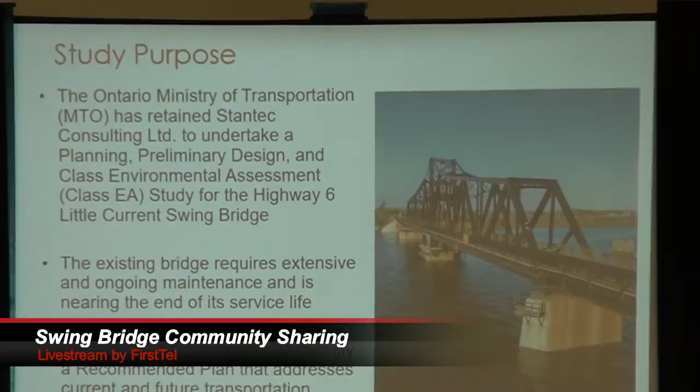Okay, so first of all, the study purpose. As I mentioned, the Ministry of Transportation has retained Stantec to undertake what we call a planning, preliminary design, and environmental assessment study for the Highway 6 Little Current Swing Bridge. Why are we doing this? Well, the existing bridge requires extensive and ongoing maintenance and is nearing the end of its service life. So what we want to achieve at the end of this study is to identify a recommended plan to address the current transportation needs at the bridge crossing.

So we're going to talk a little bit about the process that we're following. So the study is being carried out under the requirements of what we call the Class Environmental Assessment for Transportation Facilities. This is basically a pre-approved document that prescribes the process. These are the big picture statements that address the question, why are we doing this study? And then also during this phase of the study, we are identifying alternatives to the undertaking. So we're starting to look at potential solutions, and we'll talk about those in a little bit more detail.

The next phase of the study will be the planning phase. So we're just kind of nearing the end of this transportation needs assessment phase now. But then the next phase is the planning phase, and that will start with publishing a document that we call a study design report. So that will kind of confirm the first phase of the study and provide a blueprint for the rest of the study.

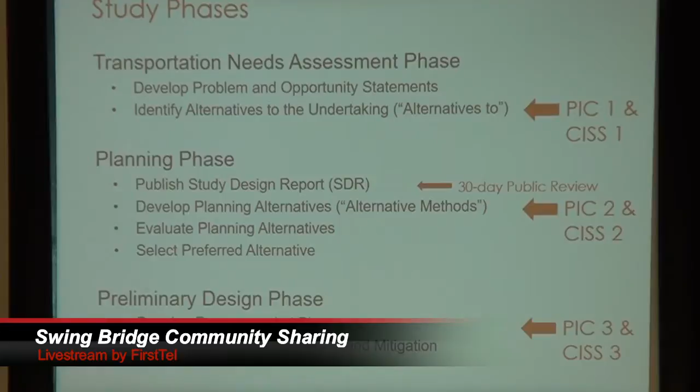Then we move into the documentation and environmental clearance phase, and that's where we publish what we call a Transportation Environmental Study Report, which is basically a report that documents the entire study from beginning to end, including those previous phases. So that will be available for a 30-day public review period. And then at the end of the 30-day review period, if there's no objections, then we will obtain environmental clearance to proceed to the next phase of the study, or the future phases.

And that would be detailed design, where the ministry will prepare contract documents and specifications, start acquiring property, relocate any utilities that need to be relocated, and then ultimately construction. So we're at the very early stages of this planning study. So a little bit of background about the bridge.

You folks probably know more about it than we do.

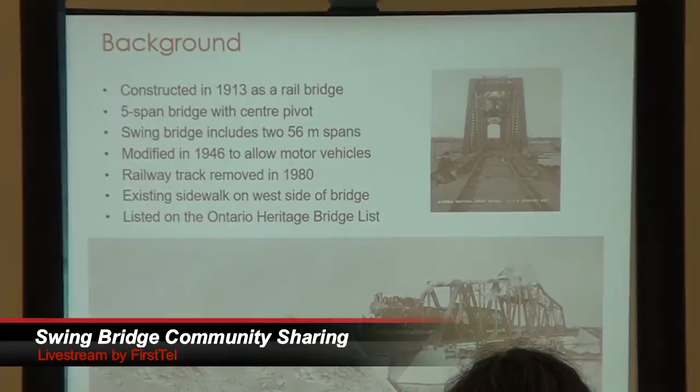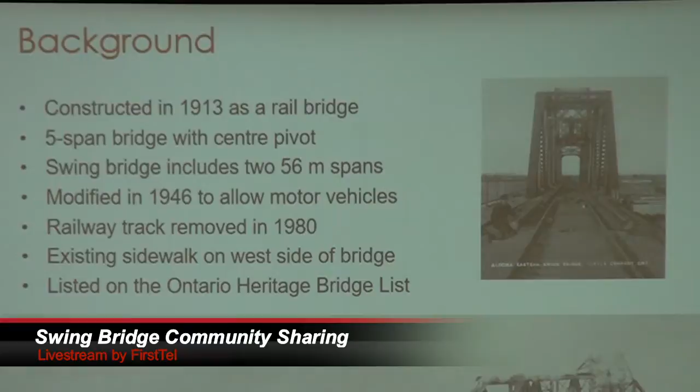It was constructed back in 1913 as a rail bridge initially. It's a 5-span structure, with just the center 2 spans that swing, making it a swing bridge. In 1946, it was modified to allow motor vehicles, so from 1946 forward it was a shared facility for rail and automobiles. In 1980, the railway tracks were removed, and the Ministry of Transportation assumed ownership of the bridge.

So from 1980 on, it became exclusively a road bridge carrying Highway 6 across the North Channel. There's an existing sidewalk on one side, and interestingly, it's listed on the Ontario Heritage Bridge list. This next slide shows the study area. The existing bridge crosses the North Channel, so we're really focused on this crossing. We're not looking at new crossings or new connections between Manitoulin Island and the mainland, just the transportation needs in the vicinity of the existing crossing. This blue area identifies a rough boundary of where we're looking for alternative crossing locations.

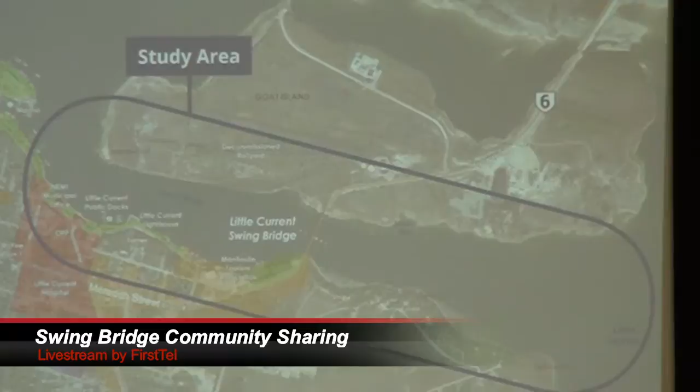So I mentioned the problems and opportunities. These are the overarching statements about why we're doing the study. There are a few problems with the existing bridge. It does provide year-round access, and it's the only permanent road connection, but it's a single-lane roadway, so there are delays associated with that single-lane traffic.

Currently in the summer months, road access is generally not available for 15 minutes of each daylight hour to allow boat access along the North Channel. So in addition to the delays caused by the single lane of the bridge, there are additional delays when the bridge swings open every hour to allow boats to move up the channel. Most importantly, the existing bridge is nearing the end of its service life and will require extensive and ongoing maintenance or replacement. So that's really the driver behind this: the age of the bridge, its condition, and the ongoing maintenance costs.

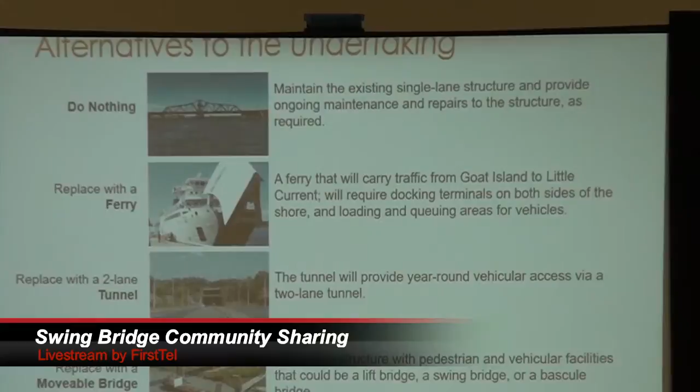So the first level of alternatives we look at are what we call alternatives to the undertaking. Just to recap the problems: there are some obvious problems with the existing bridge, namely its age and its ongoing maintenance costs. So what are the big picture alternatives to address this problem? That's what we answer with these alternatives.

The first alternative we're looking at is do nothing. As part of the Class EA, we're always required to look at the do nothing option. By do nothing, we don't just mean let the bridge fall apart - what we mean is really status quo: maintain the existing bridge, and continue to provide the ongoing maintenance and repairs required to keep this as a safe crossing.

The second big picture alternative we're looking at is replacing the bridge with a ferry. The ferry would carry traffic between Goat Island and Manitoulin Island. We should point out that it's not just a ferry - it would also require docking terminals to accommodate loading and unloading of vehicles.

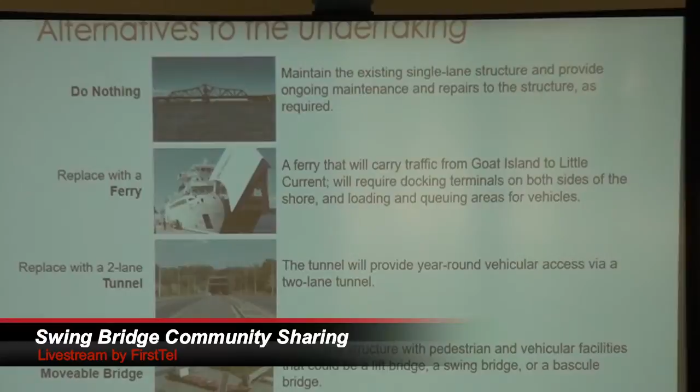The third big picture alternative is to replace the existing bridge with a 2-lane tunnel under the channel. This would provide year-round road access under the channel, somewhere in the vicinity of the study area. Due to the depth of the crossing required to accommodate the approaches, the tunnel could not be at the exact same location as the existing bridge - it would have to be shifted one way or the other to allow room to accommodate the approaches to the tunnel.

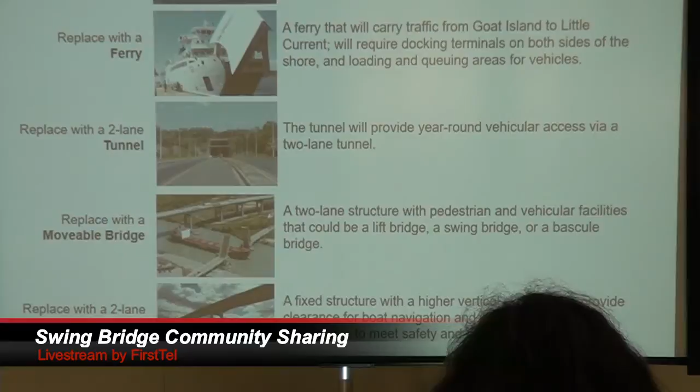The fourth alternative we're looking at is again replacing the existing swing bridge with a new movable bridge.

So again, it would be a 2-lane structure with accommodation for pedestrians and vehicles. We're saying a movable bridge, so it could be a swing bridge, or any type of movable bridge. It could be a lift bridge, or what we call a bascule bridge, where sections pivot and lift.

So that alternative is to replace the existing bridge with another movable bridge, and that could be pretty close to where the existing bridge is located.

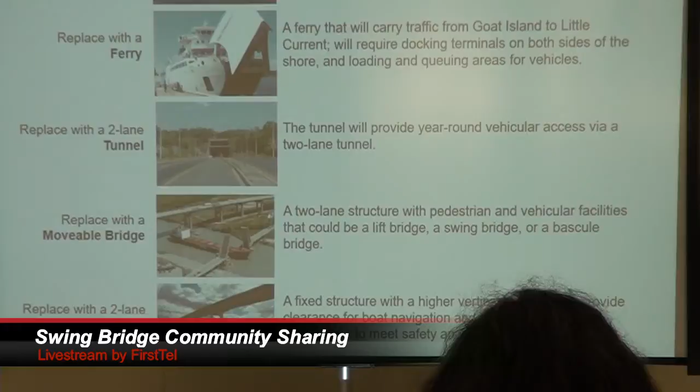And then the final alternative we're looking at is to replace the swing bridge with a 2-lane fixed bridge. What we mean by a fixed bridge is, so not movable, it would have to be high enough to accommodate the boat traffic underneath. It would require fairly long approaches to get the elevation up and over the channel so that the majority of boat traffic could cross under the bridge.

So again, because of the approach grades needed to get up and over the channel, it would have to be located a little bit further away from the existing bridge.

As part of this study, there are lots of different background studies and investigations going on that all feed into this study, helping us make decisions about potential impacts and evaluate different alternatives. This slide talks about some of the background studies ongoing as part of this study. We break them into three baskets: engineering studies, natural environment studies, and socioeconomic studies.

Under engineering, we look at traffic and safety, bridge engineering, foundation engineering, drainage and hydrology, highway engineering, and electrical engineering. So those are the very technical pieces we're looking at. Not only are we looking at the existing bridge, but also the engineering side of the different alternatives, whether it be a lift bridge, movable bridge, or fixed bridge.

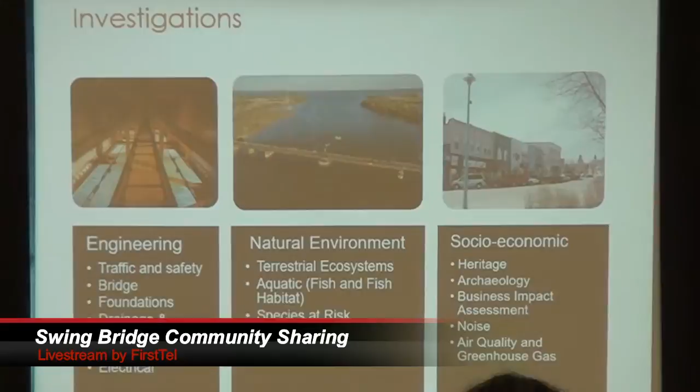Under natural environment, we have several different studies underway: terrestrial ecosystems, aquatic ecosystems including fish and fish habitat, and species at risk. Again, we gather background information so that we have a good picture of the existing conditions, so that when we look at different alternatives, we can compare them and compare the potential environmental impacts.

And then finally, the socioeconomic impacts. So we look at heritage, archaeology, business impacts, and noise and air quality. Again, we do the background baseline studies, then look at the alternatives and the potential impacts associated with them, and that helps us evaluate and select.

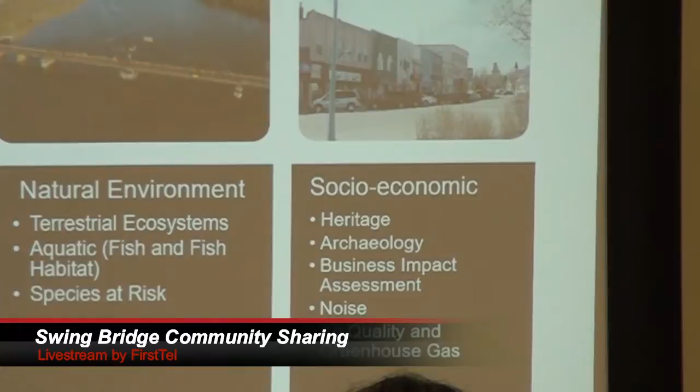Then we will have the study design report that outlines the blueprint for the study. That will be available for a 30-day public review in the coming weeks.

Then the next major milestone is the second round of public meetings and community meetings, which will happen next summer. That's where we will present more detailed alternatives.

The next major milestone after that is the summer of 2020, where we'll come back and present the preferred plan. Each of these major milestones starts with big picture alternatives; next summer we look at more detailed alternatives, and the third round in summer 2020 we present the preferred plan.

And then the environmental study report will be available for a 30-day public review period in the fall of 2020. So it's quite a long schedule, providing lots of opportunity for input and feedback and public meetings along the way.

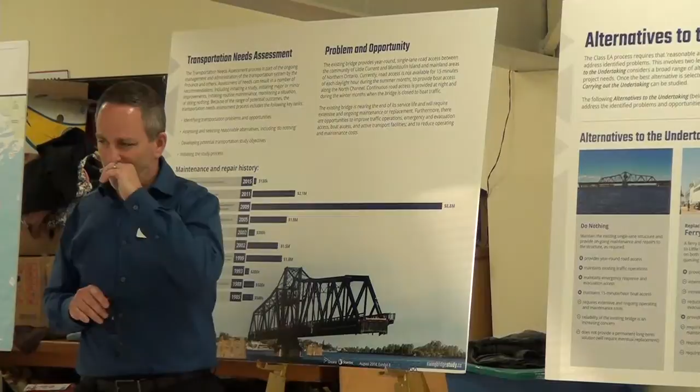Some of the disadvantages with do nothing are it does require extensive and ongoing maintenance and operating costs. Reliability is a bit of a concern. Because it's an old bridge, it could break down at any time, kind of like driving an old car. There is a concern from the ministry that the bridge could open and get stuck, significantly affecting access. The challenge with this type of bridge is that the parts are so old everything has to be custom fabricated, which takes time. So there is a bit of a risk that mechanical breakdown could cause significant delays and access issues.

And the other negative is it doesn't really provide a permanent long-term solution. The bridge is only going to last so long, so it doesn't provide a solution for the point where it becomes no longer feasible to maintain that bridge.

You have a question? Yeah, you mentioned in the presentation that the bridge is getting near the end of its service life. How many more years is that? Has it been determined how many more years is actually feasible for the service life of that bridge?

Yeah, it's hard to say. Typically bridges are designed for 75 years nowadays, like a new bridge is. So we kind of call 75 years its service life. This one is well beyond it, it's over 100. So it's really on borrowed time, but it's hard to tell.

You can always try and fix it. But you don't have a number though, as to whether it's 20 years or 50 years? No, we don't really. It's really kind of a question of the next time there's a major mechanical failure, at what point is the ministry going to stop throwing money at it?

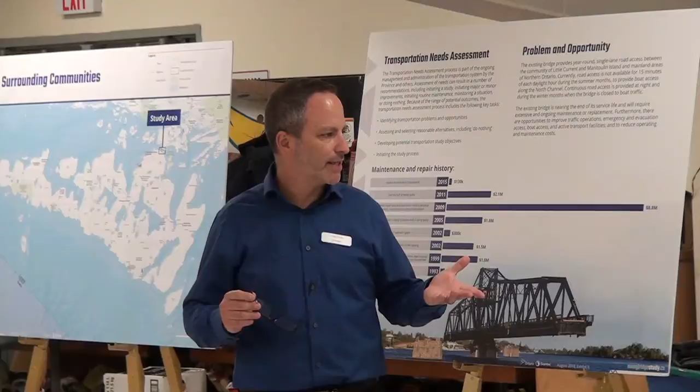The next option, replace with the ferry. In terms of positives, it does provide vehicle access and unrestricted boat access. But there are obviously some negatives. It would increase traffic delays, and it's questionable whether a ferry could actually accommodate the traffic demand without causing significant delay. Again, it requires ongoing maintenance, and to run a ferry is costly. The cost of a ferry is actually quite expensive, and it requires large docking facilities as well, so in addition to the ferry itself, it requires some additional infrastructure.

The tunnel provides year-round access. It would significantly improve traffic operations and reduce traffic delay. It would improve emergency response and evacuation access, and it provides unrestricted boat access. On the negative side, because of the approaches, it would require a bit of a realignment to accommodate the approach grades to get under the tunnel, or under the channel.

And the issue with the tunnel is it's typically very expensive compared to a bridge. Just in terms of some ballpark costs, we haven't got into the costs in a lot of detail, but a tunnel of this length would probably be somewhere between $250 to $300 million. We'd have to do some more engineering work on that to confirm that number.

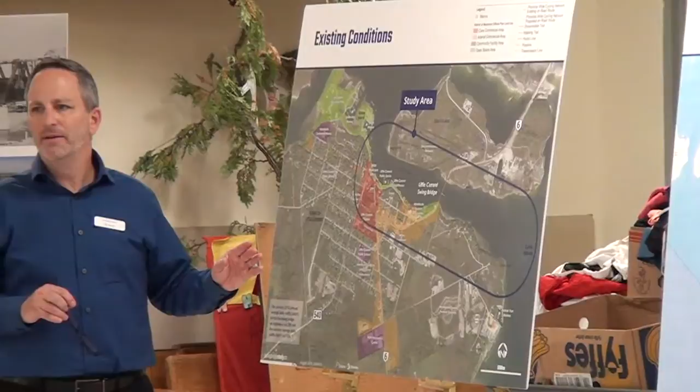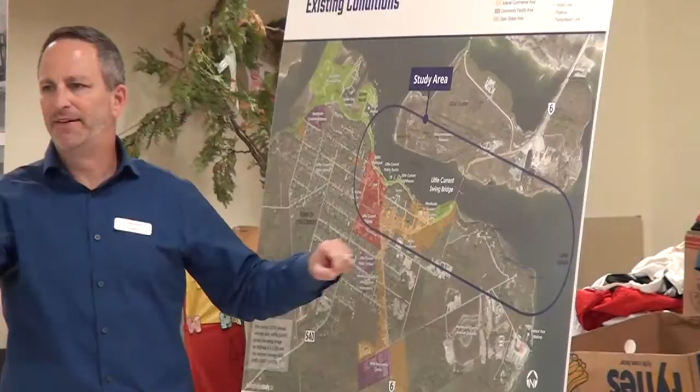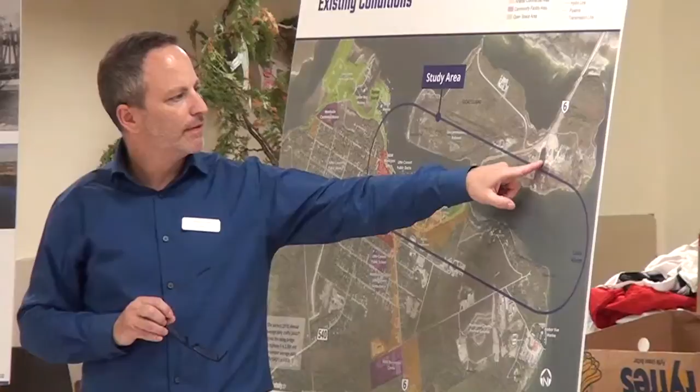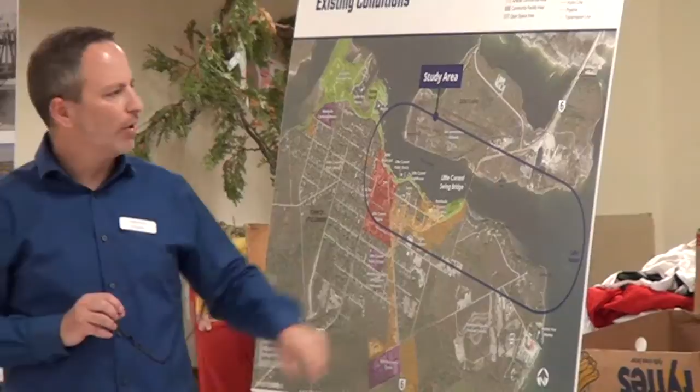I was just wondering because there's that pile of stuff from the rail line on the west side of that transformer station - hydro generators or whatever, over here on the corner there, under a tarp. Yeah, I don't know how that's going to be incorporated into the project area. There might be a concern regarding all that material underneath there - it's all contaminated.

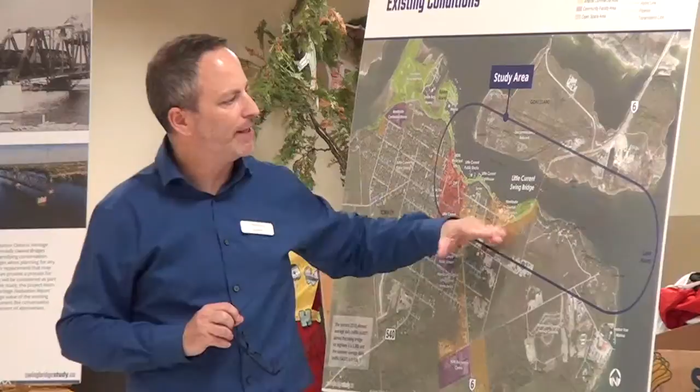So for the high level bridge alternative, you're right - we may have to be over here somewhere, and swing in. To get the distance needed to get up and over the channel, we might have to come off this curve on an angle and then swing in this way, so we'd be out in here somewhere. Then you have to look at the hydro lines there as well, and there's this contaminated material here too.

So those are all part of the background studies that we're doing as part of this study. If we were looking at something that impacted this, then we would have to come up with some answers as to what we would do with that as well.

Having the movable bridge, the drawbridge, would be my ideal - because it's like a 15-minute delay.

How long we've been dealing with that now. I think it's nice seeing the boats sitting out in the channel as you're crossing, but having the two-lane would just speed traffic up too. Yeah, so if you had the two-lane, you would eliminate the delays of just waiting for traffic to go back and forth.

So this is what you're referring to, like a drawbridge? Yeah, I guess that would technically be called a double bascule. There will be different types of movable bridges that we'll look at. That type of bridge, a lift bridge, just kind of vertically moves up and down. We'll also look at a swing bridge, and different types of movable bridges constructed elsewhere across North America and Europe more recently.

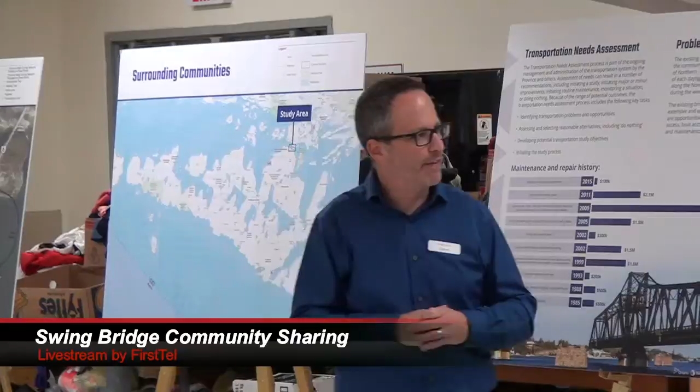We did hear from the first public meetings—the boating community came out and there was some concern with leaving it in the channel because it's just an obstacle. They said they'd rather not have it in the middle of the channel, especially if it's a type of bridge that swings open, which kind of forces everybody into the middle, lined up with where the existing bridge is sitting. So we'll have to look at that as well.

We also heard that the existing swing bridge creates two channels, which is a little bit narrow for some of the bigger boats, especially the cruise ships that come through—it's a little tight. Somebody said a big cruise ship that came through there only had a couple of feet on either side to get through, and it was a bit of a challenge for the pilot.

In terms of height, we've heard that some of the sailboats—apparently there's one that comes through once or twice a year with a 110-foot high mast. So that's probably the kind of height we'd be looking at, which is pretty significant. We were kind of thinking 100 feet when we started, but with a bigger mast, 100 feet is pretty significant, and probably up where the hydro wires are.